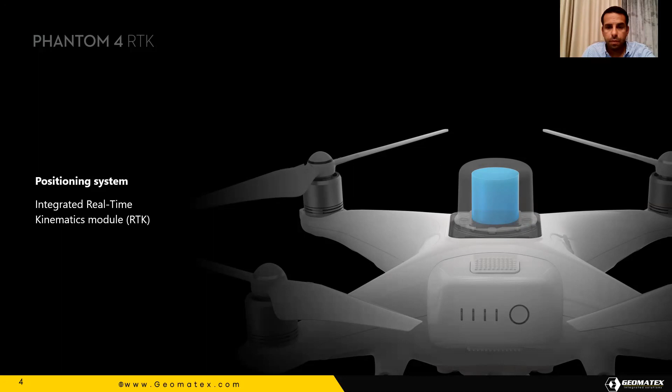Embedding this high accurate GNSS receiver, the rover became airborne. Of course, the system is redundant, so you can get more reliable results.

The mechanical shutter and the fully integrated solution could get you RTK positioning accuracy of 1 to 2 centimeters, and also vertical accuracy of maybe 2 to 5 centimeters. But if you have good conditions, it could reach the named specs.

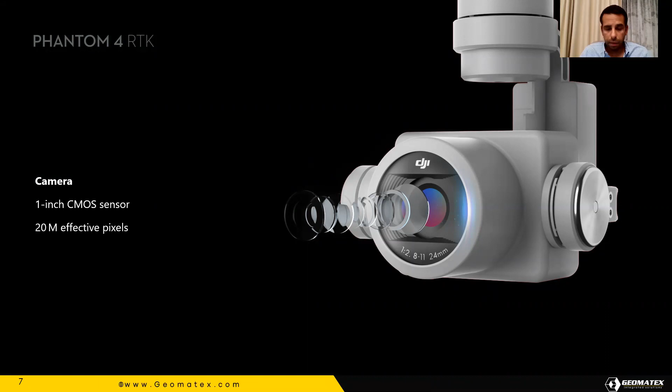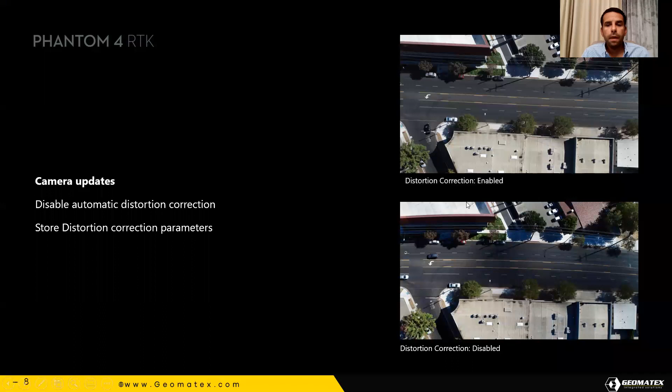The mechanical shutter in this 20 megapixel camera is very effective because it reduces the distortion all over the corners of the image, enhancing the quality of the 3D model at the end. And also there is automatic distortion correction. You can see the difference, maybe it needs to be viewed at more zoom level.

The flight controller of this camera is managed, and also the lever arm is calibrated between the center of the antenna and the center of exposure, which is much better than adding an external RTK or external PPK module because it's already integrated in the factory and already calibrated. You don't even have to think about calibration.

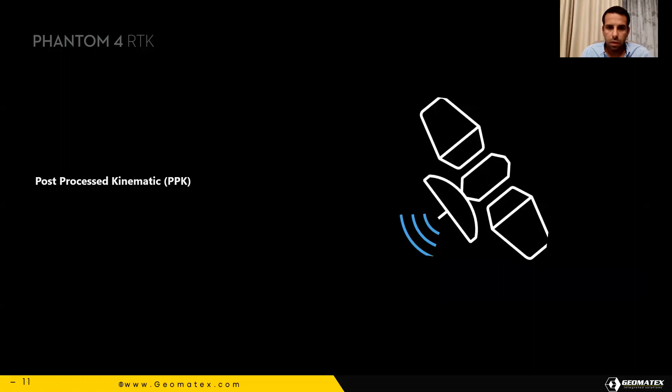Also, the quality is really reliable because it's already guaranteed or already approved from ASPRS. And now you can use your own photogrammetric tool. It can do what could be done in a very long time with traditional techniques.

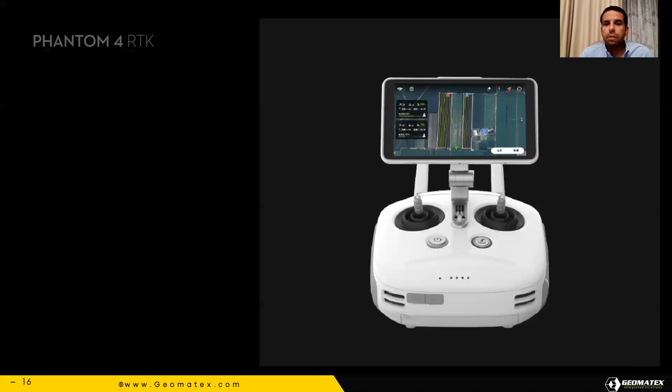And it becomes very easy because now, even in China, you can control 5 drones with this remote controller. But it's not available in all countries until now.

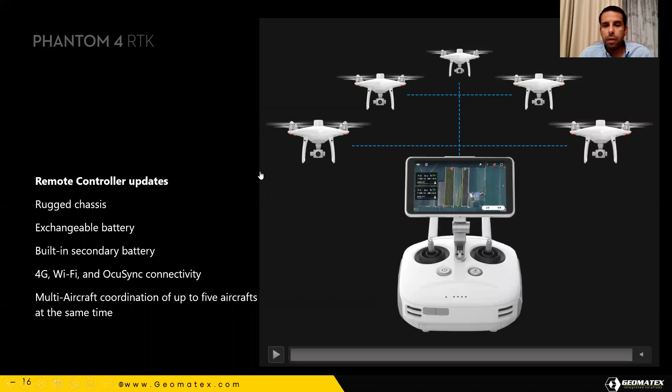The base station is GNSS. It's reading more than one constellation, which means that you could get very, very good results even if you are near a building or in a canopy. You can also connect to VRS, which is a very good option for countries which have available continuous operating reference stations, so no need for your own base station.

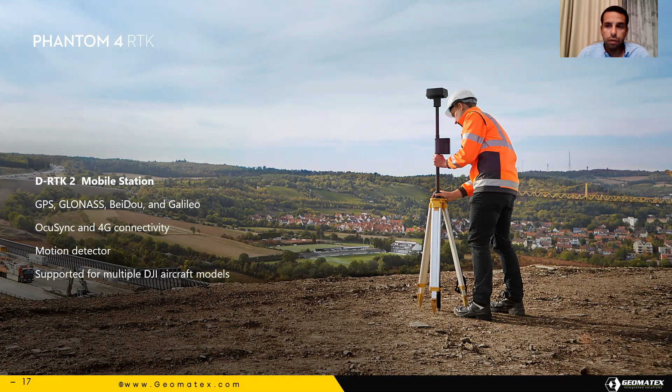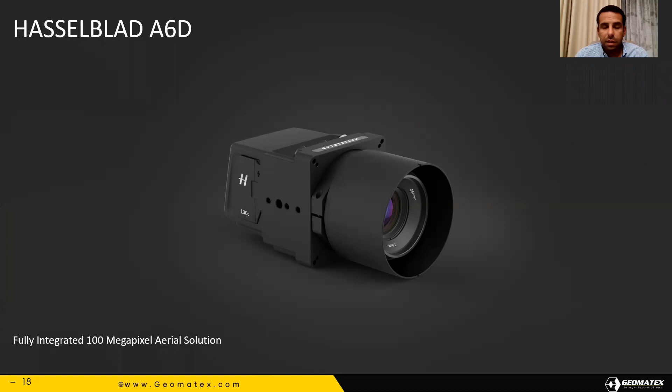If we need a bigger sensor, you may go to Hasselblad. Hasselblad introduced the A6D to the market. It could be mounted in oblique setups, it could be mounted on an airborne system, and also it could be mounted on a Matrice 600 drone.

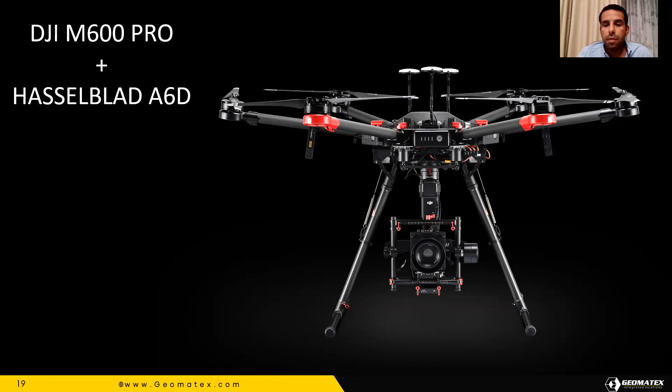Mounting this system on a Matrice 600 drone gives you very good capabilities because you can select any suitable lens for your application. You can go for a narrow lens, fly high, and still get very good coverage with very low GSD, or ground sampling distance, meaning it could be as productive as airborne photogrammetry if it's mounted on a fixed wing with a 2 hour duration.

Maybe the Tron from Quantum Systems could mount Phase One or Hasselblad. You have a very wide range of lenses.

And then we started to get the DJI M210 version 2, because with V2 you can get positioning data from the RTK, not only navigational data like the first generation of M210 or the M200 series, which enabled photogrammetric usage. And of course, after the introduction of the X7 camera, which has a very nice, big sensor with mechanical shutter, you can again get very good results.

If you are at 100 meters, you can still get 1.2 centimeters, which is really high. And then you get to the 2 centimeters or 3 centimeters which we all need in most of our applications. You can even fly up to 200 meters, which again increases the coverage of the system.

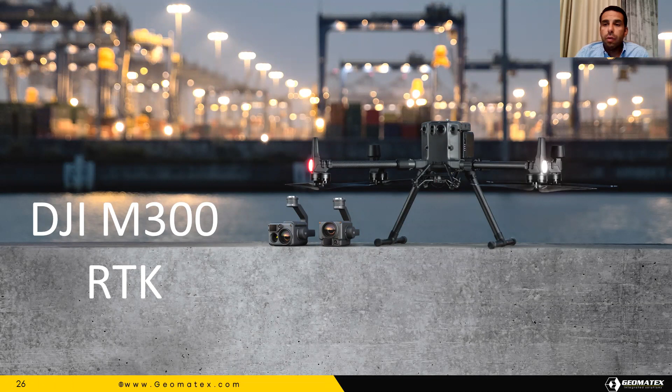And then this year we had this new workhorse from DJI, the M300 RTK. Maybe until now it's still only serving surveillance applications with its official payload from DJI, but we are waiting for more from DJI in the coming weeks. We don't know, because I believe there will be a very strong photogrammetric solution for this drone, and also a very strong LiDAR solution.

Maybe we could expect the LiVox, it's very familiar with the build-up, and also we saw an integration from Green Valley just 3 or 4 months ago, and I saw the results. It's really nice for a sensor with this cost.

The system itself can maybe fly 55 minutes, but that's without any sensor, of course you're not going to do that. But with a light sensor, I think you could get maybe 40 minutes of flight.

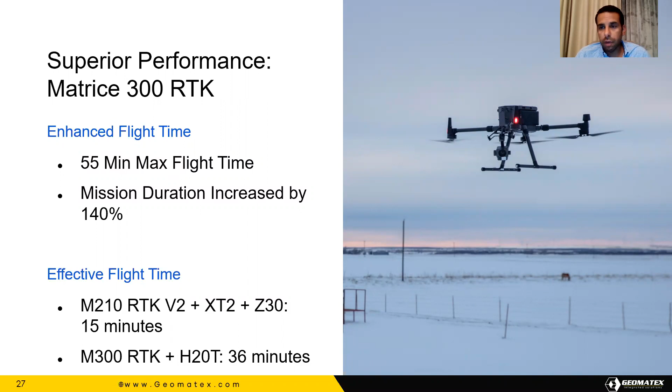The TB60 batteries are really very good batteries to fly a system, but if you are lucky to be able to ship them, because they cannot be shipped via air freight, so you should ship them as a dangerous good through the sea. But it deserves what it takes to get your TB60s and fly your M300, because you can do a lot with this system.

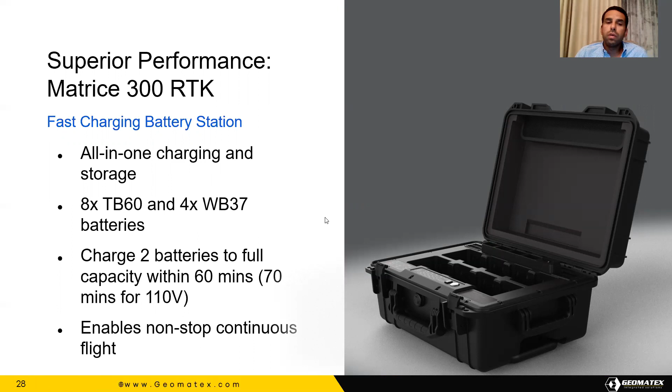You could put the batteries in the new charging battery station, and keep them in the field with you because you will need them. It started to go to the same level of duration as fixed wings. Now we speak about 40 to 45 minutes. Maybe the next generation of such category could go beyond 1 hour, which is again a very good system, because we all know that fixed wings are very sensitive to wind speed.

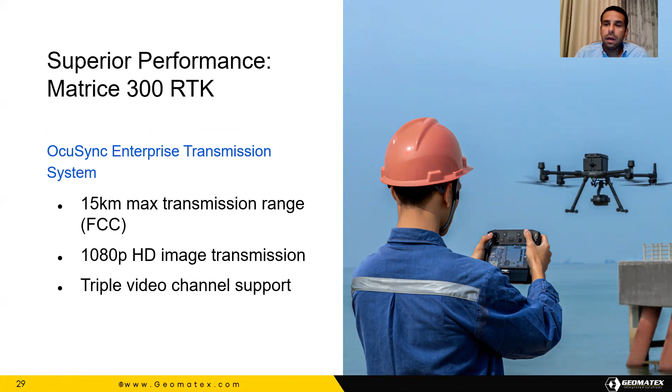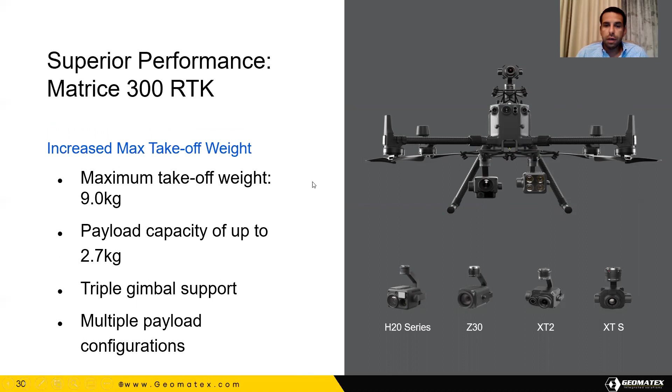15-kilometer range, again this is helping me as a surveyor to cover large areas. Again, we know that the payloads, until now, there is no official payload from DJI for photogrammetry, but another Chinese company did one. I'll just show it after a couple of slides.

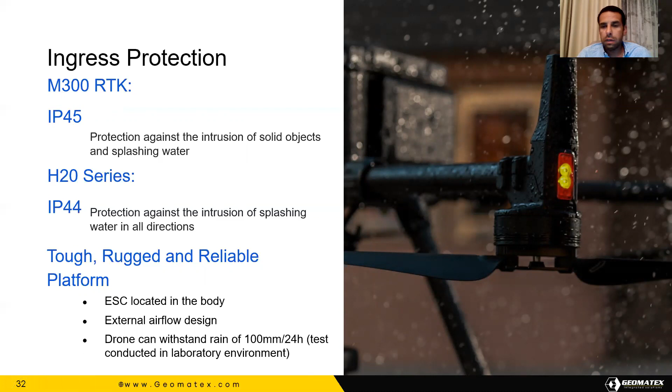The IP rating is very good, very high, which means that you are still confident sending your asset in the air, even when you are feeling that it might be rainy. But when it's raining, you should come back, because it's not logical to use photogrammetry, or even if the drone is IP rated, I don't think the sensor will be like that.

I love the redundancy, because when the system is built up on a redundant design model, you get very reliable results, and also you get fewer problems.

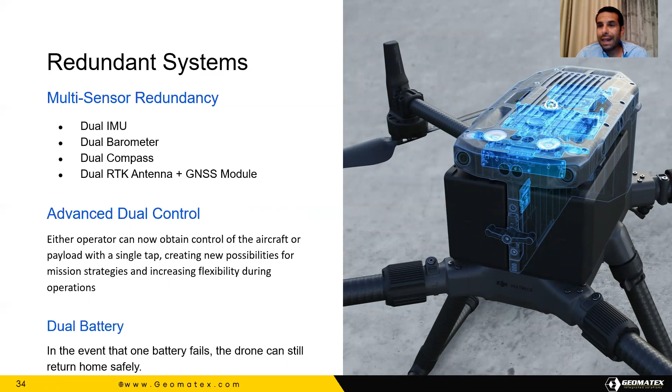This is the system I'm telling you about from Rainpoo. It's nadir and oblique cameras together, 5 cameras taking the 4 angles you need. So instead of flying 4 times with different angles, you are getting them in one time, plus your nadir if you need to produce DTM or DSM.

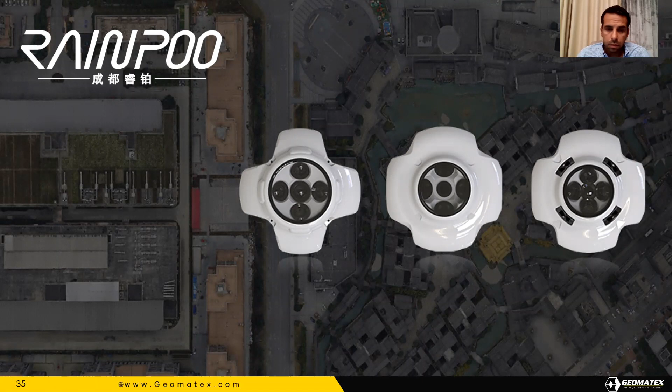They have different varieties with different specs. I'm just showing them because I believe this system will have some competitors. Until now, they are the first company to get introduced. I met the guys in Intergeo, yeah, my favorite show.

I go there every year, but maybe this year we're not lucky having the show, so I've forgotten the name. Intergeo is going to be virtual also this year, like AirWorks.

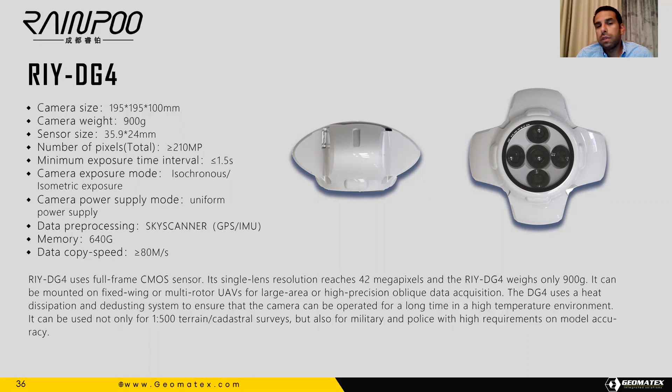We hope to get back seeing each other face to face, because those kinds of conferences and business and professional exhibitions are really important to move up the industry, because we all need to meet to know what you did with this sensor, did it work with this drone, did it not work, how can you share sample data. Also for the vendors to meet the customers is very important.

But again, I really want to thank all the team behind AirWorks, because they made it very professional level. I believe this is changing our behaviors toward virtual conferences.

So the LiDAR was mounted on the M300 from a couple of integrators, but I believe we could see it without those things here from DJI. I believe this must be very near.

For those who don't know, LiDAR is like a laser scanner. You can scan up to 500,000 points per second, maybe with a Riegl VUX if you're lucky and have the budget to buy it, or maybe from Velodyne or Livox. We have many sensors coming in the next year, because as I told you, the technology became cheaper.

This is the specs of the Livox Mid-40. If someone is interested, you can just pause the recording and get the specs if you like.

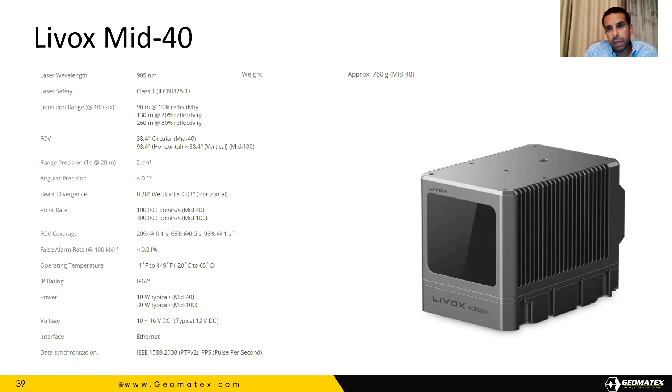When you speak about LiDAR, we must mention YellowScan. They don't provide their own sensor technology, but they do this in the software because they integrate the best parts in the market - Applanix, Riegl, Velodyne, maybe something's being cooked in the kitchen. But I believe YellowScan will have a big footprint in the market, making it very easy for non-professionals to use LiDAR.

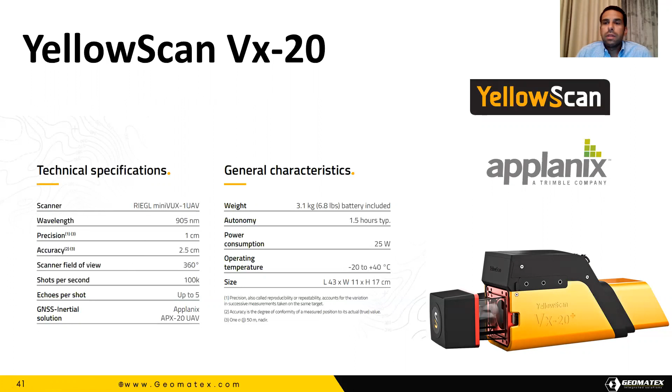I'm just trying to show you the latest technology, what's happening in the market, because this is what will help us create our digital twin. Digital twin is a very flexible term, and I'm not going to debate it now.

Let's see what the United Nations said about a smart city. Smart city or smart infrastructure provides the foundation for all of the key themes related to a smart city.

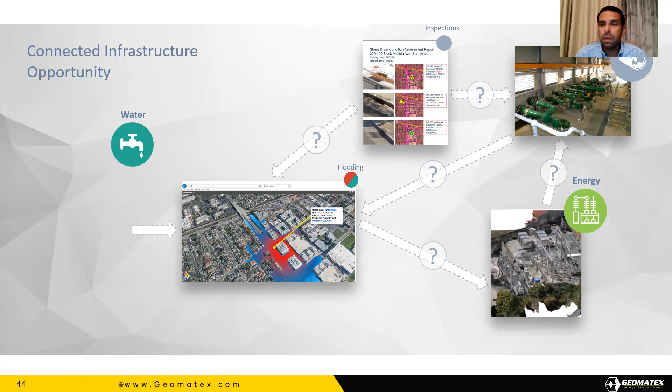If you still have those question marks, and you really have the storm network and the electricity to run it to suck this water, but it's not done automatically, you have nothing. You invested a lot of money for nothing at the end. So how can we solve that?

Solving that means having a digital city, having a connected infrastructure. How can we reach this level? It's through putting all those networks together on a reality mesh or on a digital twin. So a digital twin could be a dumb digital twin or an intelligent digital twin - this depends on the data you are overlaying on it, and also the data you are expecting out of it.

There is no time for us to monitor every sensor. We now have millions, even billions of sensors acquiring data every moment. So we need a big data analysis mindset to digest all those sensors and also to act in the digital city with a performance that lets you make use of your intelligent infrastructure, which can see each other.

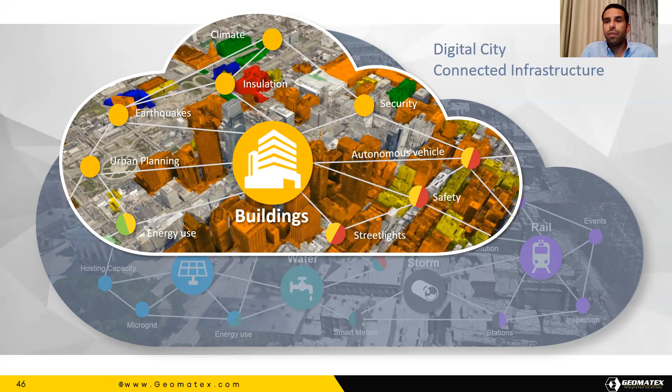Let's have an example here. If you have a 3D model, you can easily implement or apply an autonomous driving system. Security will be enhanced. Also, if there's an urban planning exercise, it will be much easier because you don't have to go to the field - you just open your computer, open the model, take your dimensions, put your CAD model, get approval from the authorities, and you don't have to make a lot of steps since you already have a 3D model.

And they have ProjectWise to run the project during construction, and they have AssetWise, which can run the asset after it's already built, serving all sectors.

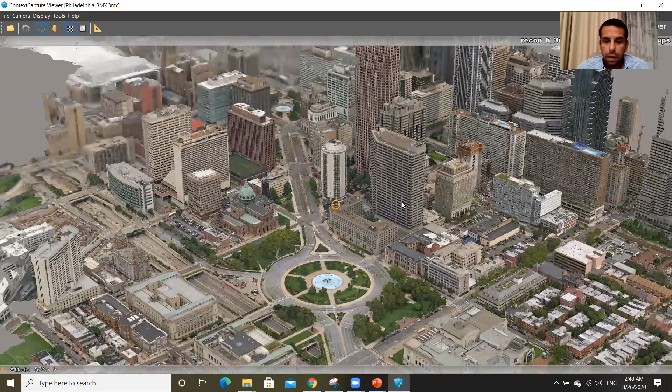What is a reality mesh? This is what we could call a 3D model for a city-scale 3D model. This is Philadelphia. It was for a VIP visit, and they had to make a 3D model for the city.

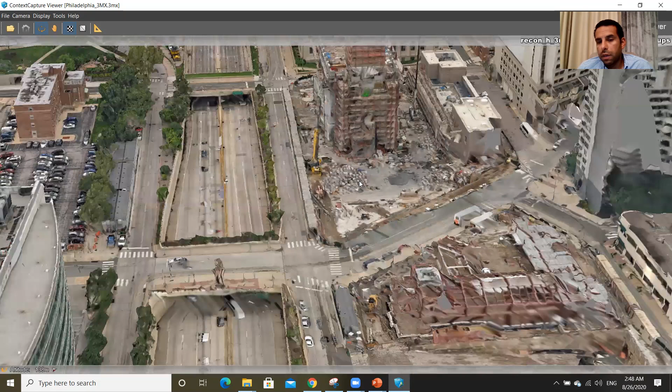After that, they found they were discovering the city from another perspective. You can easily see if the sites are adhering to the safety margins or the safety instructions. Maybe the resolution is lower when you're at this level of zoom, but you can enhance your accuracy if you fly with different gear at a different positioning height.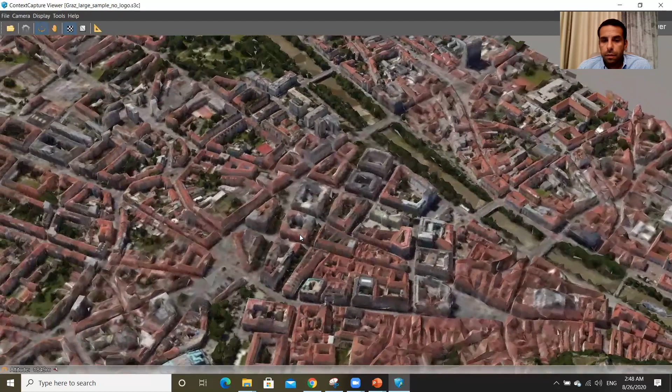We can have another model with better resolution so you can really feel it. This uses Bentley Context Capture, which generates those models. I think Bentley Context Capture is the best solution for reality modeling. If you don't have a budget problem, it's the correct choice. You could even model a whole country, or whatever size you need, because it's very optimized to do this.

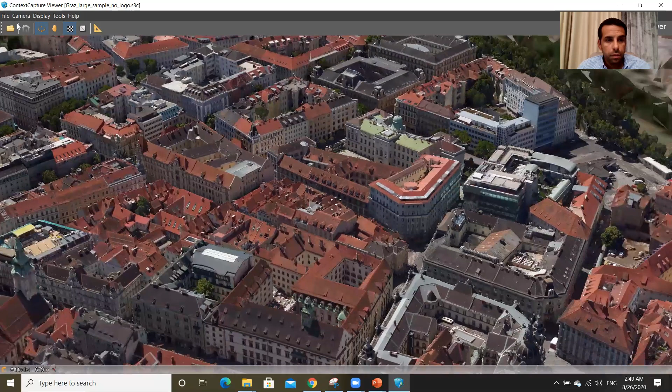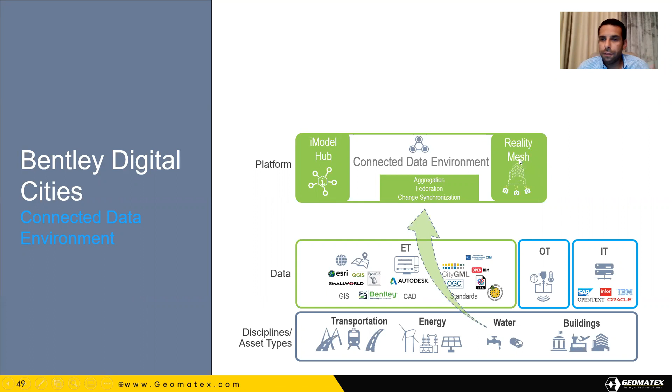So let's get back to our presentation. I just wanted us to get the feel of the reality model, which applies all of this together. Then you can use this in any Bentley application or any third-party application, and you can have a virtual city at the end. Let's see some examples.

Maybe this is an example from a road planning or bridge planning application. You can use your reality model to design what you need, and then change some things and do whatever you want.

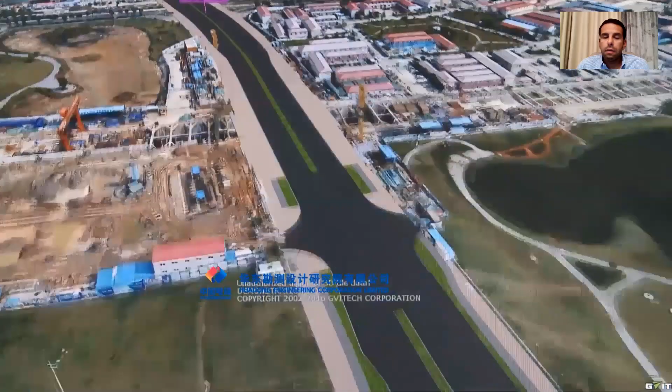Here's also a subway station in China. You can put the design in, respect the existing infrastructure, and plan for future infrastructure, all on the reality model. You can still put your CAD drawings for what is to be, and then have an integrated point of view to decide what to do.

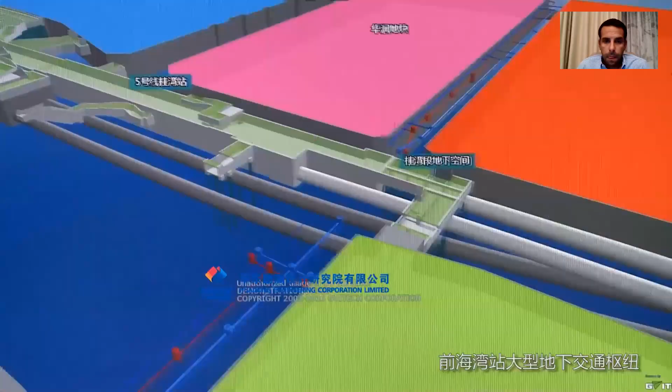Bentley Digital Cities again gives you some nice options. With iModel technology, you have the iModel Bridge, which enables users to keep their data in their data silos, where they own and control it.

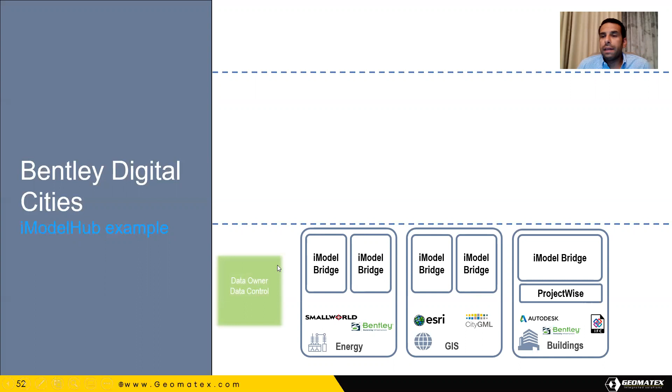For a specific case, using iModel Hub, reality modeling, and connected data environments, if you need a specific case study or analysis, you can sniff specific data from specific sources, keeping the data owner in control and secure over their data, and finish your analysis. You can do this daily, on different levels or bases.

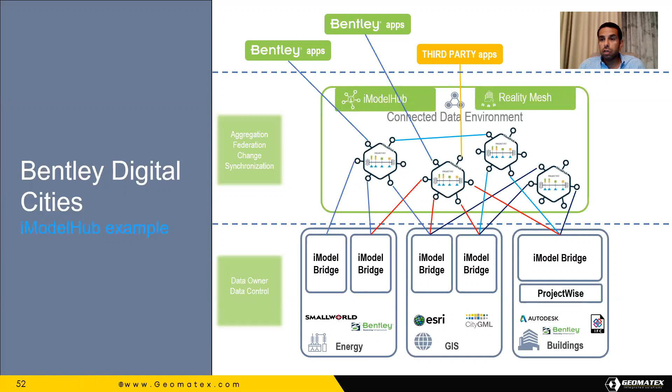You can aggregate, federate, change, or even synchronize any kind of data together according to the permissions data owners give the user for a specific need. This could be used with Bentley apps or third-party apps like Esri, or any spatial data infrastructure you have. What are the benefits of that?

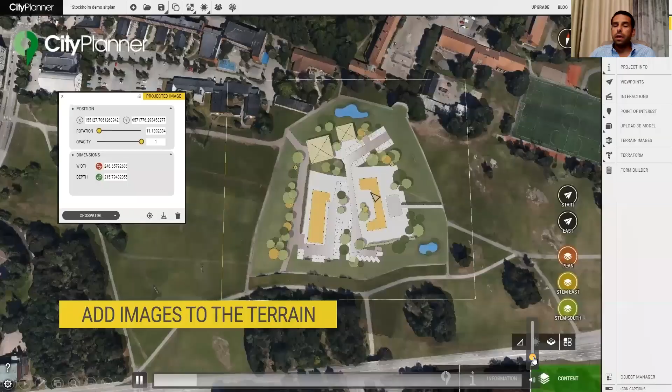Here's City Map - sorry, City Planner, from Agency9, which was acquired by Bentley. The music is a little loud, I can mute it, but I like this track, by the way.

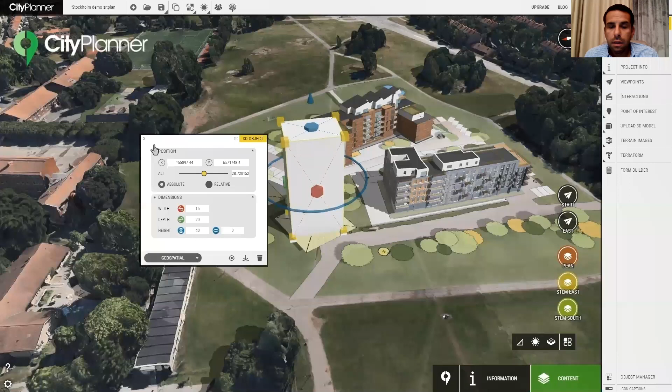This application can make it very, very easy for you to plan - take a simple CAD model and see how the design feels on the reality model.

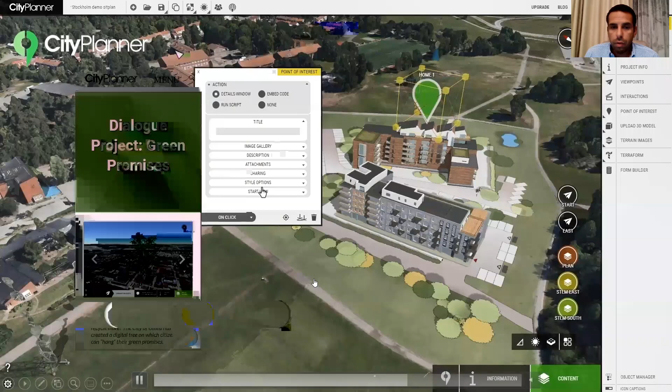What's nice is that as a municipality, you own the model and you give me access to put my ideas in to see, and they can decide and give advice or whatever. All of this is online, and at the end they can just revoke my access, and I could then apply for the permit or application. It is very, very interesting.

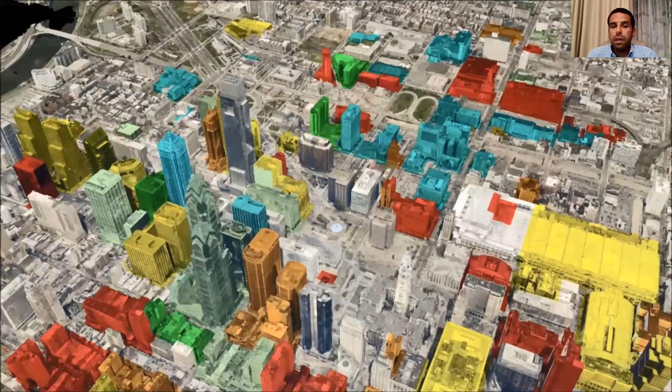Also, we could apply different GIS layers over a 3D reality mesh according to conditions - if there is an epidemic, an announcement, if someone didn't pay taxes, if someone is doing something illegal, or if I just need to announce a promotion. I can use the reality model for this, beside urban planning, because this is one of the most basic applications.

Flood analysis is very, very important given what we're facing from climate change and what's happening in different cities. You could see Helsinki is one of the first cities in the world which had a digital twin or 3D model.

So now when we have connected infrastructure, we have a digital city. We could overlay all this data together and have synergy between our expensive assets.

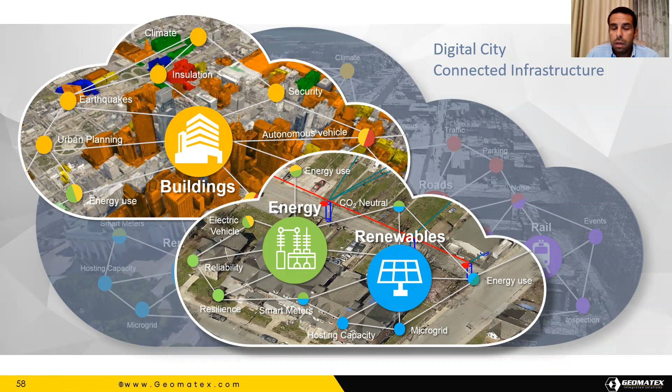So using your mobile, using a stereo camera, using LiDAR, using a camera, or even something simple like this Phantom 2, or any drone, you could get a 3D reality model and use it in planning, design, construction, and operation over a connected data environment based on a reality modeling platform.

We're not today debating what a digital twin does. I'm just telling you, to have a real digital twin, you should have a model which is twinning the reality. The concept itself has been promoted in different dimensions, that a digital twin is just merging some data together - but if you don't have a model, it's not a twin. You will not identify a twin if it's not similar to you. And then you can manage these digital assets.

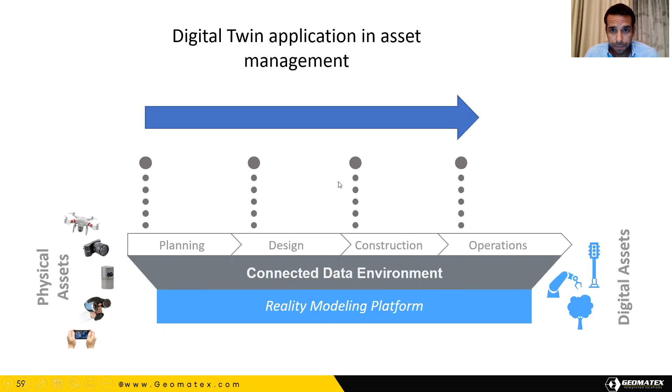This is the last video we are having.

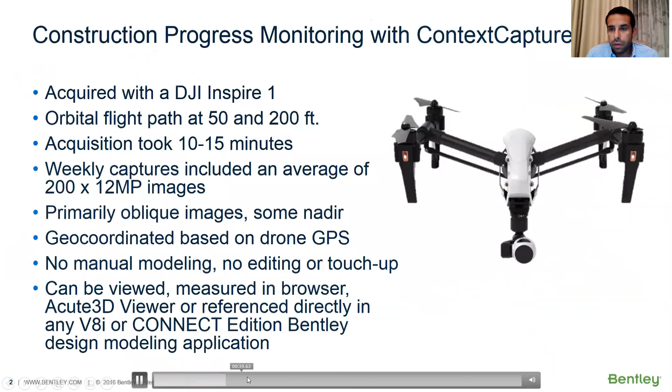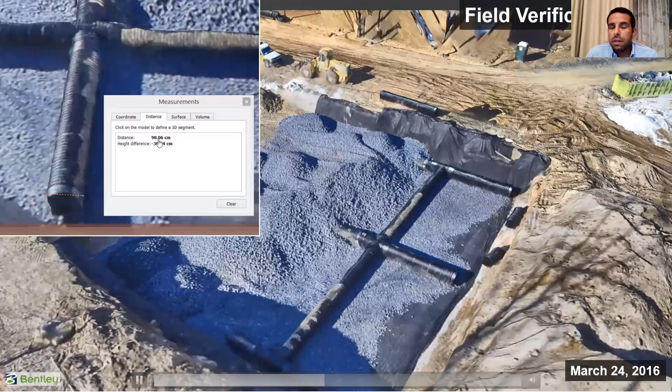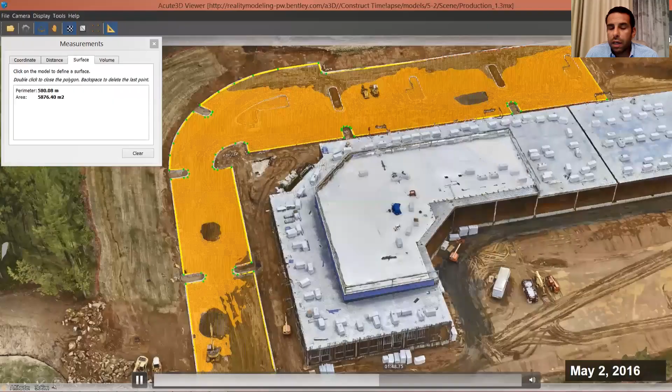This is how you can manage a site and monitor the construction progress. Maybe you can just fly once a week using any drone, 10 to 15 minutes per week, and then you can have full control over your construction site. You can even take dimensions before burying those tunnels to make sure they are at the same distance as per design. You can easily get any volumetric calculation and easy cut and fill to know how many trucks you need to move a pile. A lot of applications can be done with a very, very cheap and simple application.

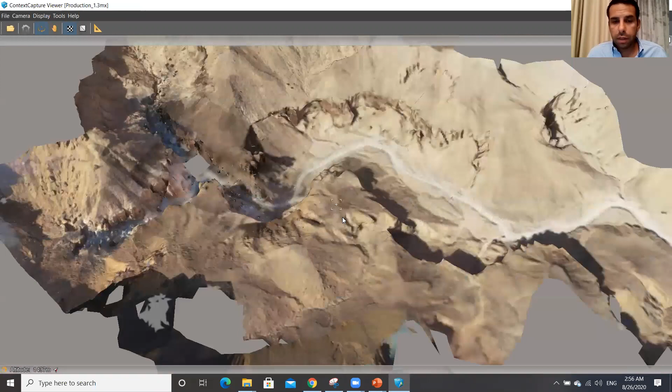This is a model done with the P4 RTK, with very, very precise manual mapping. It was done by the Egyptian licensed company iFly. They are our partner, and we were doing this as an exercise for Discovery Channel. This is the famous Valley of the Kings, an extension of it, and this is a new tomb which had been discovered. Maybe in a couple of years you can visit it when you come to Luxor.

If anyone has visited Egypt and Luxor before, this is one of the most famous and mysterious places in the world, in which you can find a third of the monuments of the world hidden on this mother rock. The pharaohs were smart enough to hide their treasures because they knew the environment would hide it, and then you have to search by hand to find their treasures.

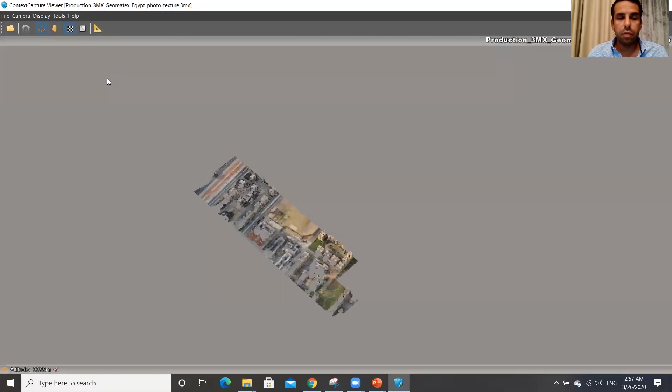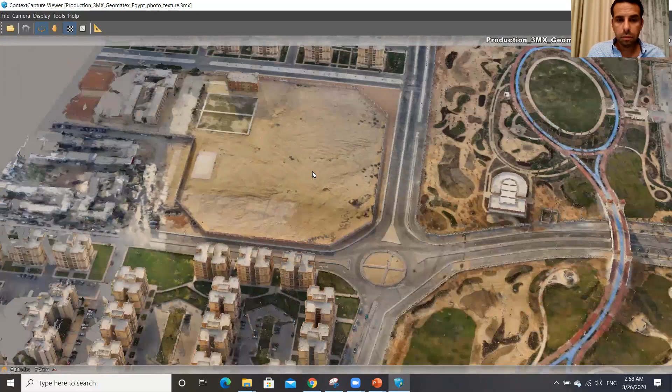Another very interesting model I have - it was done for the first time between Bentley and Riegl by the Geomatex team, and we are very proud of this project. It was a Riegl RiCOPTER we delivered to a customer in Egypt, mounted with the VUX-1 system, and you can reach 6mm accuracy reality mesh.

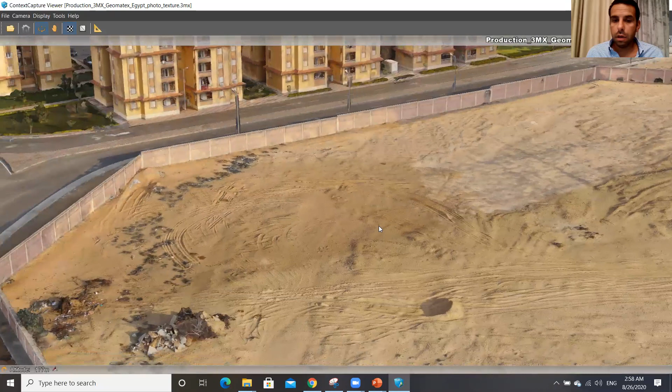We did a different approach for this model. We did not fuse point clouds and images together to get a colorized point cloud, because then you lose the texture of the photogrammetry. I did the meshing first - I took the images from the two oblique cameras and did the photogrammetry reality model processing. After this, we simplified the data of the point cloud, fused them together, and used the point cloud to correct the geometry of the reality mesh we already had.

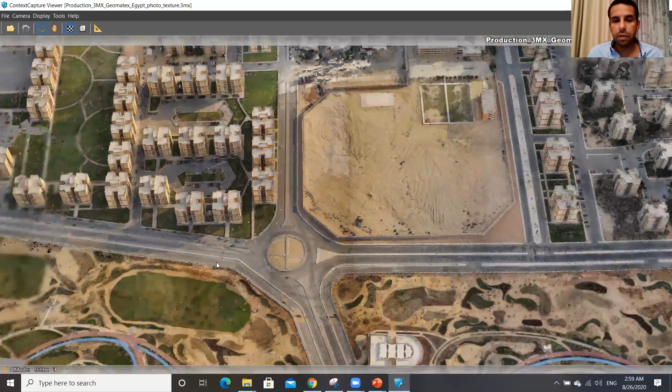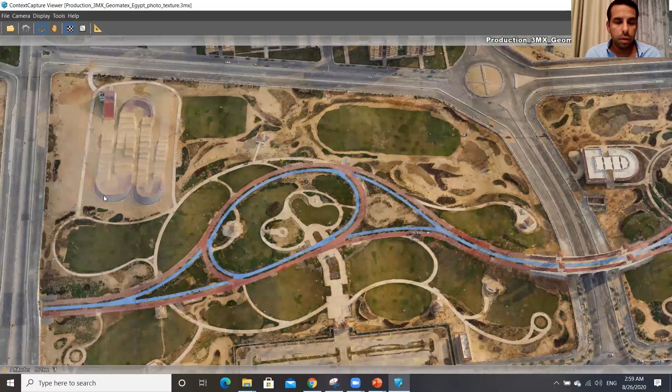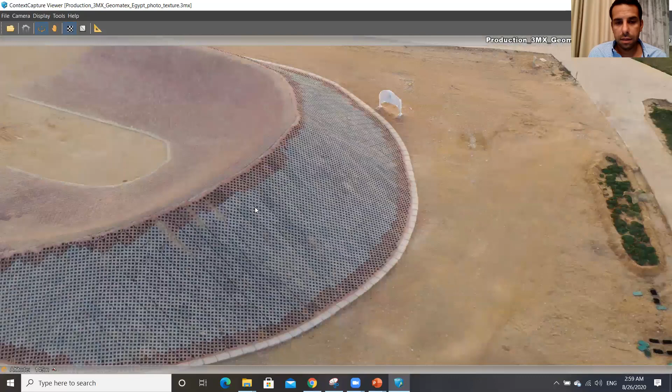You can get magnificent results. This is a city in New Cairo, the new administrative capital - the newest, and I believe it will be one of the most iconic capitals in the whole world because it's entirely new. It's a track for bikes, and you can see the modeling is ultra precise, getting the best of both worlds, photogrammetry and LiDAR. I think this is the best thing to end our session today.